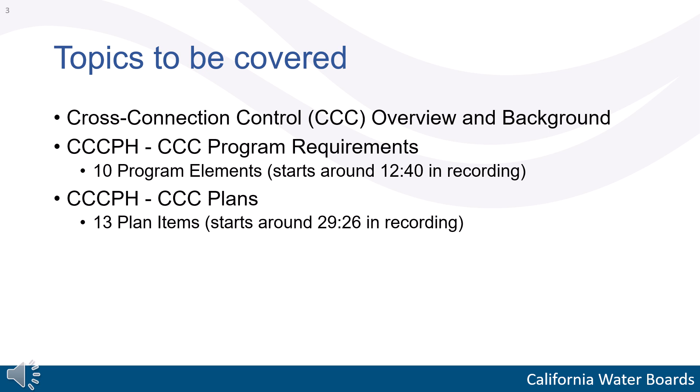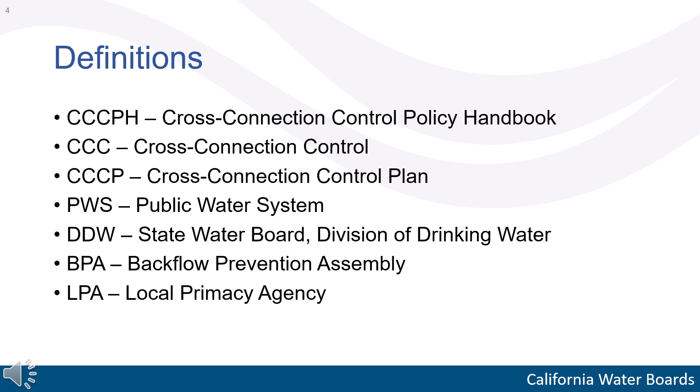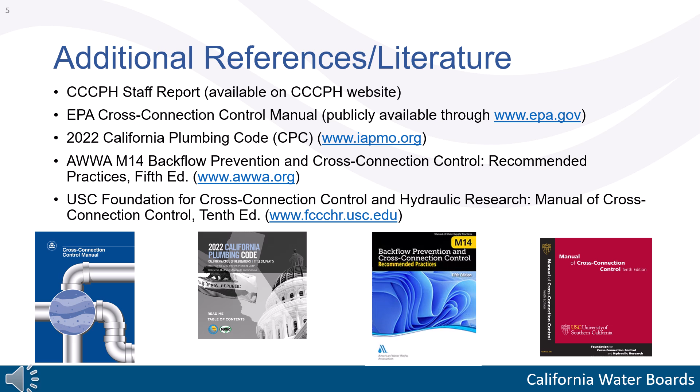This presentation primarily focuses on describing the requirements listed in the handbook. If you feel you need additional information on topics contained in this presentation, here is a list of other resources available. There is a staff report that accompanies the handbook and provides background into the requirements of the handbook. The staff report is available on the state's handbook website. Other sources listed here include the EPA Cross-Connection Control Manual, which is publicly available for free through the EPA's website. The California Plumbing Code contains plumbing requirements, some of which were carried over into the handbook, and is available through IAPMO. AWWA M14 and USC's 10th edition manual for cross-connection control have a lot of useful information on backflow prevention assemblies and developing a water system's cross-connection control program.

On our Cross-Connection Control Policy Handbook website, we will post any updates, latest copy of the handbook, any proposed changes for public review and comment, cross-connection control plan templates for small community water systems and non-community water systems, information for certifying bodies looking for state recognition, and the email backflow@waterboards.ca.gov to contact us with any general handbook questions. Any questions specific to your water system or review of your plan should be directed to your local DDW district or LPA office.

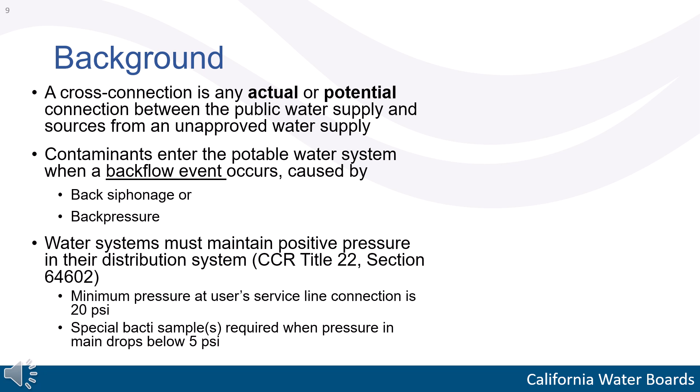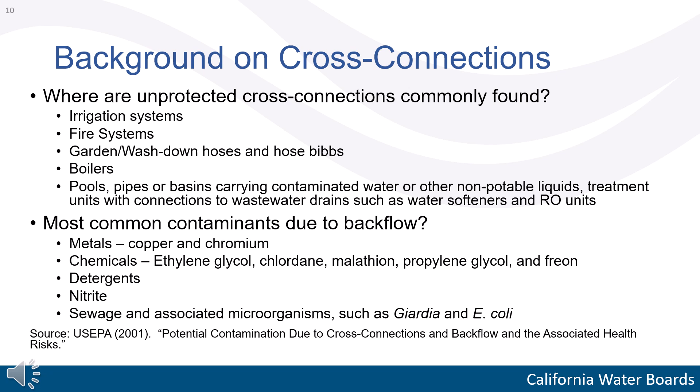When backflow does occur, the most common contaminants found include heavy metals such as copper and chromium, pesticides such as chlordane and malathion, chemicals such as ethylene glycol, propylene glycol, and freon, detergents, nitrite, and sewage microorganisms such as E. coli and Giardia. Some of these contaminants can cause acute illnesses. Many backflow incidents go unreported or undetected.

When a cross-connection exists, backflow protection is needed. This can be done in the form of an air gap, which are commonly built into household fixtures. Air gaps are also needed in industrial applications to provide a physical separation between the potable water supply and industrial processes or wastewater drains. Per the plumbing code, any wastewater or sewer drain must be separated from the potable water supply through an air gap. Air gaps must be inspected regularly as they can be easily bypassed or modified.

For when an air gap is not practical, there are several types of backflow prevention assemblies and devices. Assemblies that can provide backflow protection and are installed in the waterline are the Reduced Pressure Principle Assembly, or an RP, Double Check Valve Assembly, or a DC, Pressure Vacuum Breakers, or PVBs, Atmospheric Vacuum Breakers, or AVBs, and Single Check and Dual Check Valves. RPs, DCs, PVBs must be tested annually.

RPs can provide protection against health hazard contaminants, back pressure, and back siphonage. DCs can also protect against back pressure and back siphonage, but they can only be used in low hazard situations. PVBs and AVBs are found on irrigation systems and protect against only back siphonage, but not back pressure.

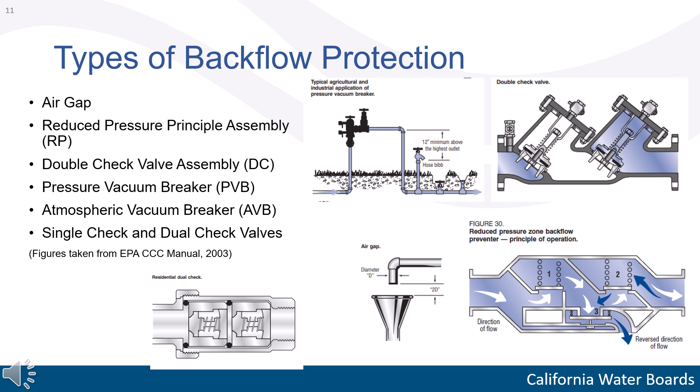What is the responsibility of public water systems? The previous regulations, Title 17, and now the Handbook, require water systems to protect the potable water supply through the implementation of a cross-connection control program. Title 17 had required 6 elements in a cross-connection control program, while the Handbook now has 10 required elements, which are presented on the next slide. A cross-connection control program is intended to reduce the risk of contamination of the potable water system by identifying, eliminating, and controlling cross-connections. Per the Handbook, the program must be described and documented in a cross-connection control plan.

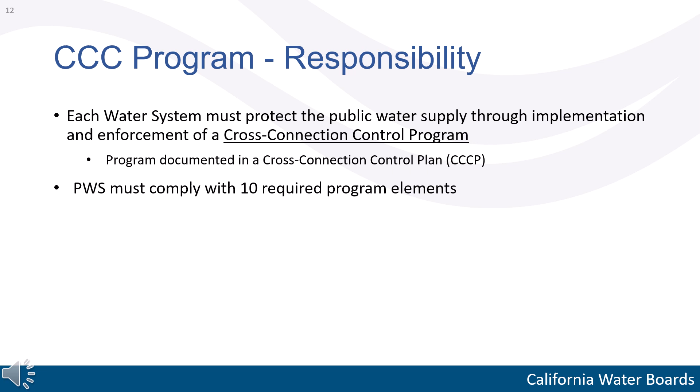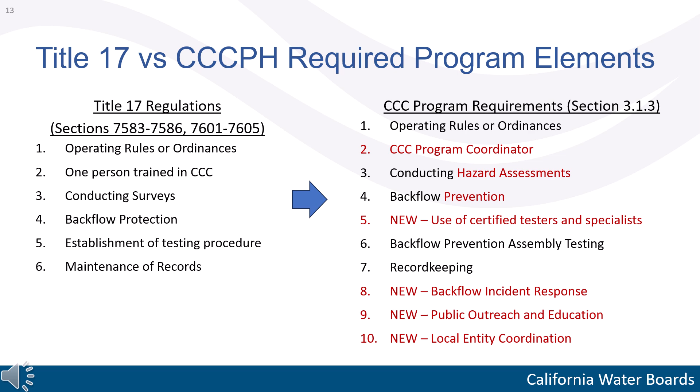It's also important to note that the Handbook focuses on protection of the water system at the service connections, also referred to as the premise containment protection or meter protection. This is a little bit different from protection requirements within customer premises, such as protection at the taps or point of use, and this is considered internal protection. The staff report and AWWA M14 manual also provide additional descriptions of each of the required elements.

Cross-Connection Control Program Element 1, Operating Rules or Ordinances, or also referred to as Legal Authority. The Handbook provides water systems the legal authority to administer its cross-connection control programs. In order to administer the program, water systems need to have a set of operating rules or ordinances to enforce requirements on its customers. This was also a requirement under Title 17.

Under the Handbook, water systems also need to include a corrective action to ensure compliance with the Handbook requirements, such as penalties for delinquent testing, installation, and repairs. These corrective actions could consist of discontinuing water service or fines, or the water system could opt to install, inspect, and maintain the backflow assemblies for the customers.

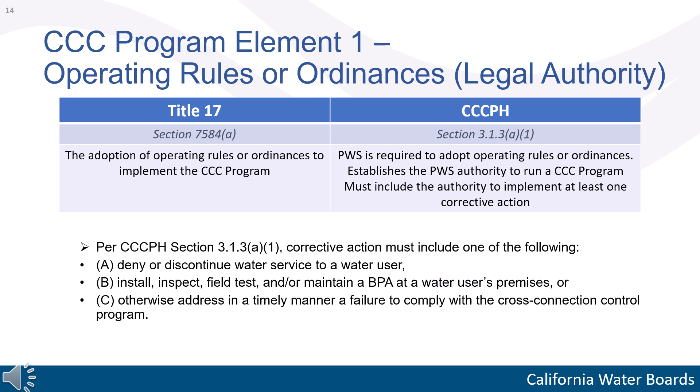Legal authority could come in the form of a municipal code, ordinance, resolution, bylaws, or written agreements between the water system and its customers. If a water system maintains ownership of all the water use facilities within its system, such as government-owned institutions, individual schools, or businesses that also manage its own water supply, then this should be noted on the plan in order to cover the legal authority requirement.

Cross-Connection Control Program Element 2, the Program Coordinator. The Handbook provides much more specificity on staffing requirements for administering a cross-connection control program. All water systems must designate a coordinator to ensure that the program is consistently maintained by a designated person.

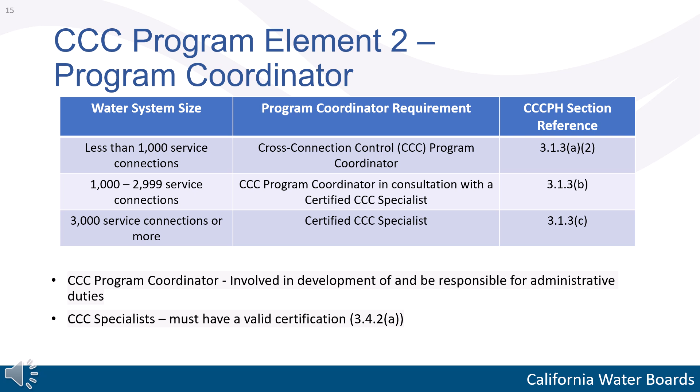For water systems with 3,000 service connections or more, the coordinator must also be a certified cross-connection control specialist. Water systems with 1,000 to 2,999 service connections need to consult with a specialist on developing the program, writing the plan, and reviewing hazard assessments.

Cross-Connection Control Program Element 3, Hazard Assessments. What is a hazard assessment? A hazard assessment is the evaluation of a water user's premises for the potential of backflow and the associated degree of hazard to the public health through the water supply if backflow were to occur. These evaluations were required under Title 17.

The intent of a hazard assessment is to identify potential hazards from a water user that could pollute or pose a health risk to the distribution system. Identified hazards need to have adequate backflow protection.

Internal protection, or backflow protection within the premises, can be used, but this is generally more difficult to track as a water system jurisdiction ends at the meter. For Handbook compliance, backflow protection corresponding to on-site hazards is required at the service connection unless internal protection is used. The hazard assessment requirement also includes residential connections, which were also included under Title 17.

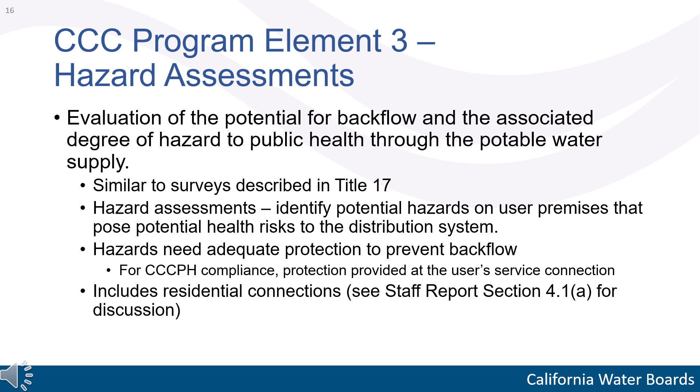The purpose of hazard assessments is to assess the degree of hazard posed by the on-site plumbing of a water user and determine what type or if backflow protection is needed. Training on cross-connection control is needed to identify these hazards.

The hazard assessment must consider the items listed in the table here, such as existing cross-connections, materials used on site, likelihood of backflow occurring during back siphonage and back pressure events, piping complexity and modifications, any pressurized systems on site, auxiliary water supply sources, previous cross-connections, or backflow incidents.

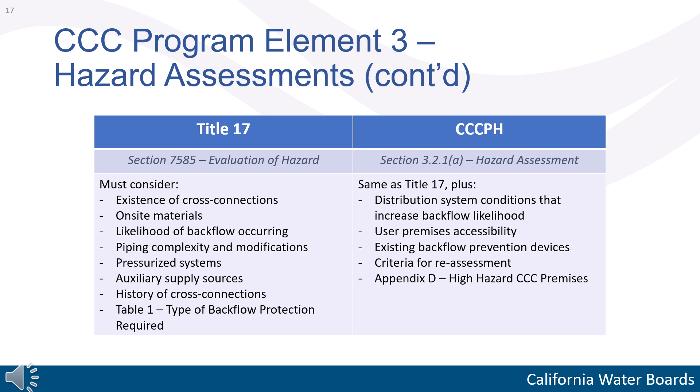The Handbook also includes inherent characteristics of the distribution system that increase the chances of backflow, accessibility of the user's premises, existing backflow prevention assemblies, and criteria for reassessment.

For hazard assessments, some premises have already been identified to be high hazard. Appendix D of the Handbook provides an example list of premises that require backflow protection in the form of an RP or air gap. Some of these examples were previously listed in Title 17, Table 1. To identify a premises as a high hazard premises on this list, the water system must have a current hazard assessment documenting the hazards for the user's premises.

Service protection is also required for high-rise buildings and any structures, including residential homes, that are situated at a higher elevation than the distribution system. Requirements for fire protection systems are noted separately in Section 3.2.2 of the Handbook and are required within 10 years of the Handbook effective date, which is July 1, 2024.

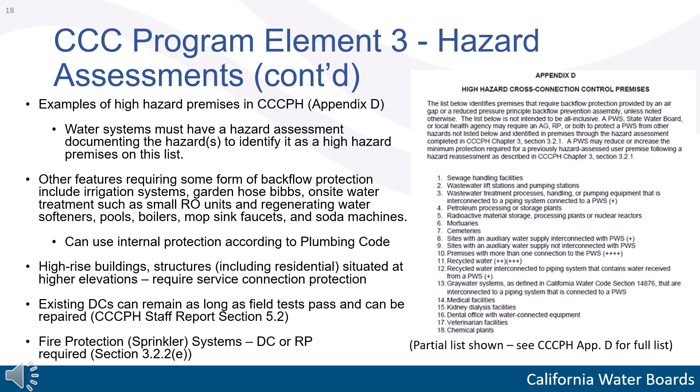How are hazard assessments to be conducted? Hazard assessments must be conducted by a certified cross-connection control specialist or by somebody with cross-connection control training and overseen by a certified specialist. A hazard assessment can be done through an on-site inspection. However, on-site accessibility may be problematic for some premises.

The handbook notes that the hazard assessment can be done off-site using administrative tools such as customer water use surveys, a review of building or permit records, review of water use activities, and GIS tools. Each method has its benefits and drawbacks. The method of hazard assessment depends on the specialist and water system preferences for its own water system. The chosen method needs to be described in the cross-connection control plan, which will be discussed later.

Any hazard assessments that have been conducted in the past can be used for the initial overall hazard assessment as long as the conditions of the water user have not changed. The handbook also requires reassessments to be performed when triggered by certain criteria listed under Section 3.2.1 of the handbook. This includes the changing of account holders, new or reconnecting service connections, changes in water use on the premises, backflow incidents occurring, or if the water system concludes the existing hazard assessment is no longer current. Reassessment is also needed on a periodic basis or upon request by the State Water Board.

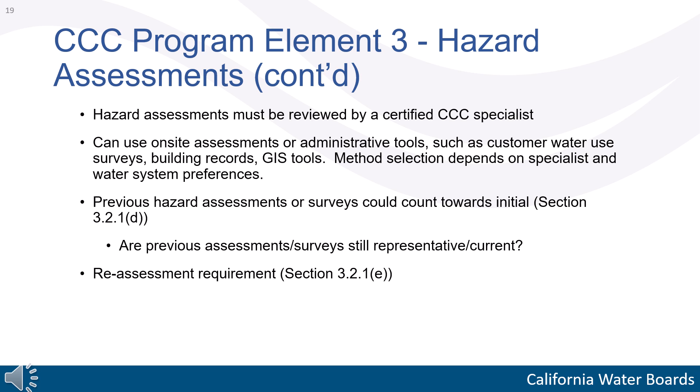Cross-Connection Control Program Element 4, Backflow Prevention. Required Program Element 4 covers backflow prevention, which is ensuring that cross-connections are eliminated when possible or controlled by the installation of an approved backflow prevention assembly. This type of backflow protection should correspond with the highest identified degree of hazard at a water user's premises.

This table shows the Title 17 requirements compared to the handbook. Title 17 required assemblies pass laboratory and field testing by a recognized testing organization, while the handbook further defines those standards, which includes standards from USC and ASSE. The handbook also stipulates that assemblies cannot be modified after approval. The handbook also provides more specific installation and design requirements, including those for air gaps. Diagrams for backflow prevention assemblies are provided in Appendix C of the handbook.

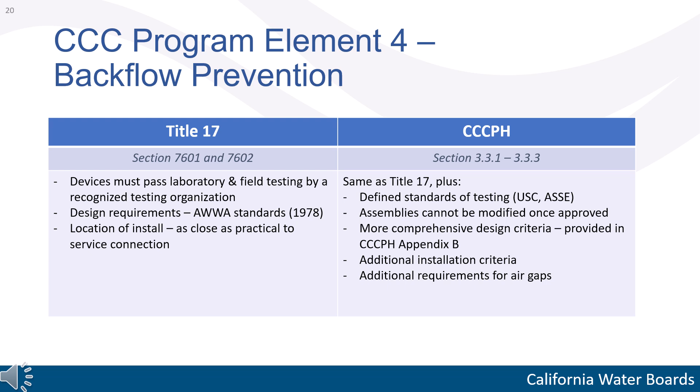More on backflow prevention. Per the handbook, cross-connections should be eliminated or protected with a backflow prevention assembly. Water systems will need to implement corrective actions on its water users when an unprotected cross-connection has been found, the installed backflow prevention assembly does not correspond to the hazard identified, or the assembly requires maintenance or replacement. Testers do need to notify water systems in a timely manner of assemblies that have failed testing, been modified, removed, or pose a cross-connection risk. The handbook also includes criteria pertaining to swivel-ells in Section 3.2.2d and Appendix C.

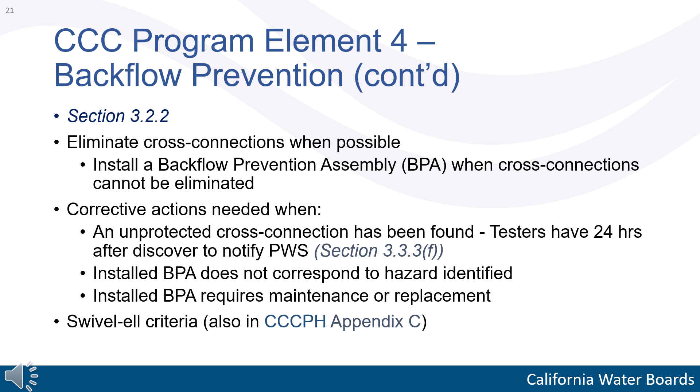Backflow prevention with respect to fire sprinkler systems. The handbook specifies requirements for fire sprinkler systems. Water systems are required to ensure its distribution system is protected from fire systems with at least a double check within 10 years of the handbook's effective date, which is July 1, 2034. Fire systems that are considered high hazard, such as those that allow chemical addition, require protection with at least an RP. This requirement also applies to existing fire systems and fire department connections, or FDCs.

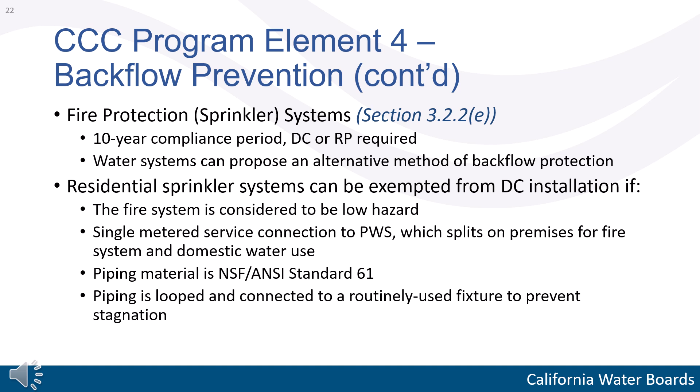When a double check or an RP cannot be installed on a fire protection system within 10 years, water systems may propose an alternative date or alternative method of backflow protection. These alternatives must provide the same level of protection. Low-hazard residential fire systems may be exempted from DC installation if the system is considered a flow-through system, where the residence is served by a single service connection for both domestic and fire use, piping material is NSF/ANSI 61, and the piping is connected to a fixture to prevent water stagnation. This exemption does not apply to fire systems requiring protection with an RP.

Cross-Connection Control Program Element 5, Tester and Specialist Certifications. Tester and Specialist Certifications was added to the handbook as a new requirement. Previously, Title 17 had noted testers and specialists only needed to demonstrate competency, which was generally done through training and/or certification from various organizations with no regulatory oversight.

The handbook specifies certain requirements specifically for certifying organizations, which include obtaining State Water Board recognition through an application and review process, obtaining ANSI accreditation by July 1, 2027, and training, course, exam, and recertification requirements for both tester and specialist certifications. The state website has a list of certifying organizations posted. Some organizations are working on obtaining State Water Board recognition.

Cross-Connection Control Program Element 6, Backflow Prevention Assembly Testing. Assembly testing requirements in Title 17 have been mostly carried over to the Handbook, with a couple of additional requirements. The type of backflow protection must correspond with the degree of hazard identified through the hazard assessment, and this needs to be verified through field inspections.

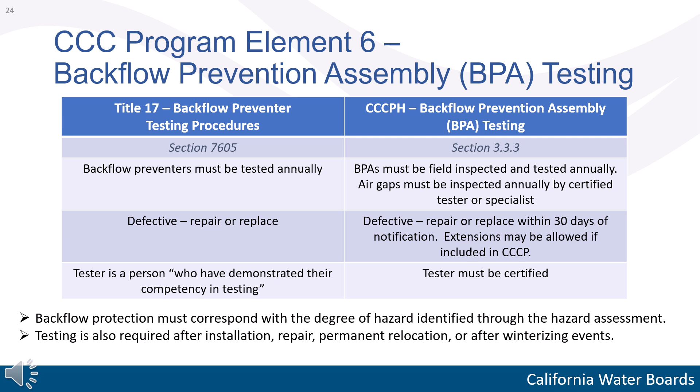Cross-Connection Control Program Element 7, Record Keeping. The Handbook expanded on the record-keeping requirements from Title 17. Each backflow prevention assembly, air gap, and swivel-ell used for Handbook compliance must be recorded along with its assembly type, model, location, recent tests, install date, and any repairs conducted. Records must be kept on file for at least 3 years.

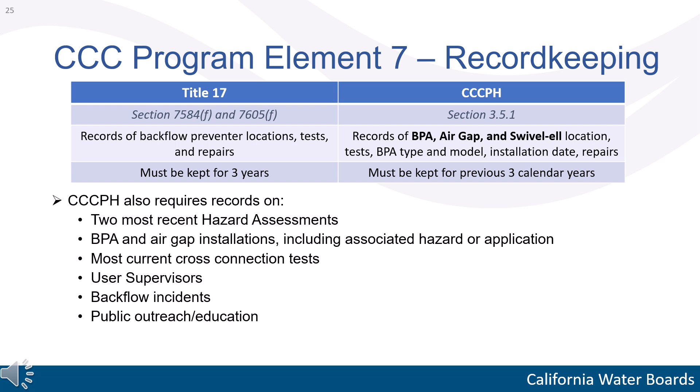The Handbook also requires water systems to maintain records on hazard assessments, associated hazard for each backflow prevention assembly and air gap installation, any recent cross-connection tests, a list of user supervisors, records on backflow incidents, and any materials used for public outreach and education. Water systems can store these records on paper or electronically using a database.

Cross-Connection Control Program Element 8, Backflow Incident Response Reporting and Notification. Backflow Incident Response is a new program element that was added to the Handbook. This element requires water systems to investigate, respond, and provide notification to the state when a suspected backflow incident has occurred. Many suspected backflow incident investigations are triggered by customer complaints about their water quality or by an outbreak of illnesses or disease.

Water systems must document its response to the investigation, such as recording any samples, water pressure changes, or corrective actions or follow-up activities performed. Water systems are required to notify their DDW or LPA office of any known or suspected backflow incidents within 24 hours of determination. The water system may be requested to provide a backflow incident report. Notification to the state is also needed for coordination efforts between local agencies, public notification, and assistance with any follow-up activities.

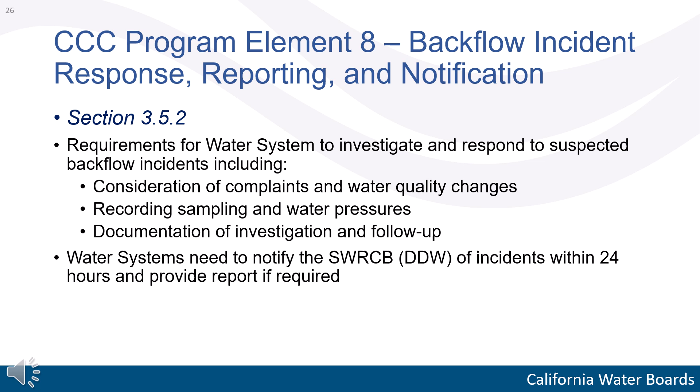Cross-Connection Control Program Element 9, Public Education and Outreach. Another new element added to the Handbook is a requirement for public education and outreach. This is intended to educate and inform water staff and customers, as many are unaware of the health risks and impacts from cross-connections and backflow. With more knowledge, the hope is that customers will be more aware and knowledgeable of their plumbing fixtures and water use, reducing the number of cross-connections and thereby reducing the likelihood of backflow incidents.

Water systems can conduct public education and outreach through a couple different ways, such as using bill inserts, language in the consumer confidence reports, websites, outreach events, etc.

Cross-Connection Control Program Element 10, Local Entity Coordination. Local entity coordination is a necessary component of an effective cross-connection control program. Installation and/or modification of backflow prevention assemblies, such as those in new construction or redevelopment projects, often involve plumbing code officials such as building and safety or permitting departments. Oftentimes, these officials or departments are informed first about the new water users and plans that are assessed for hazards and backflow protection.

Backflow protection assemblies found on fire protection systems often require coordination with the local fire department or fire marshal. Internal backflow protection, such as those found in restaurants, hospitals, and other commercial establishments, may be under the purview of local county health departments. Coordination between local entities and water systems is also necessary when a backflow incident occurs.

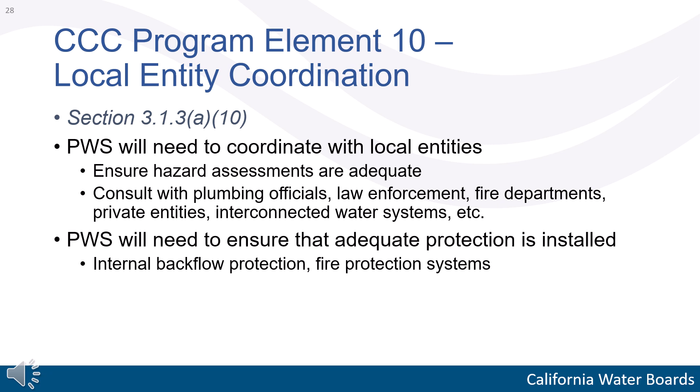Cross-connection control plans. A new requirement with the Cross-Connection Control Policy Handbook is the development of a cross-connection control plan. The plan is due 1 year after the Handbook's effective date, which is July 1, 2025. Water systems can request an extension if more time is needed to develop the plan. Public water systems are required to implement a cross-connection control program in accordance with the requirements in the Handbook.

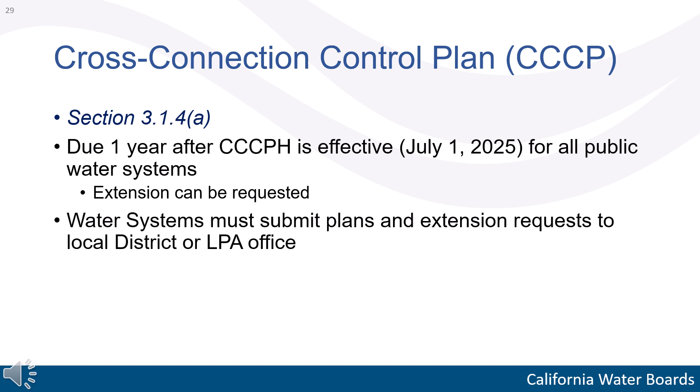The cross-connection control plan is one of those requirements and serves as a document description of a water system's cross-connection control program. A water system can implement its plan before receiving plan approval from the state. If a water system needs a special or expedited review of its plan, they should coordinate this with their district or LPA office. In general, each water system is different, and the plan should be written to reflect these differences within each water system.

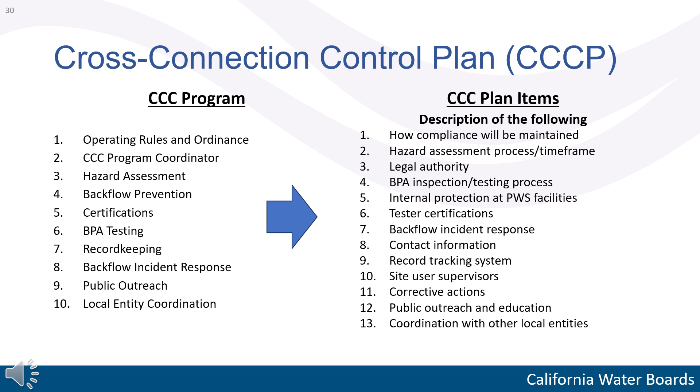Cross-connection control plan item 1, the compliance statement. The compliance statement is a description of how the water system will achieve and maintain compliance with requirements in Chapter 3 of the Handbook. This can be a basic statement such as, the water system will protect its potable water supply through the implementation of its cross-connection control program described in this plan, or something similar.

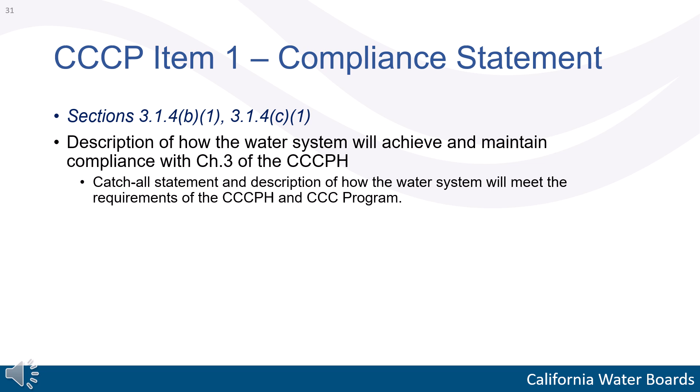Cross-connection control plan item 2, hazard assessments. The water system must describe its process used for conducting hazard assessments. A hazard assessment can be done through an on-site inspection or using administrative tools such as customer water use surveys, review of permit records, review of water use activities, and GIS tools. Each method has its benefits and drawbacks.

The method of hazard assessment depends on the type of premise being assessed, specialist, and water system preferences. The water system also needs to note who will be conducting the hazard assessments. Options include the water system's certified specialist, or trained staff being overseen by the certified specialist, or an outside contractor with a specialist certification.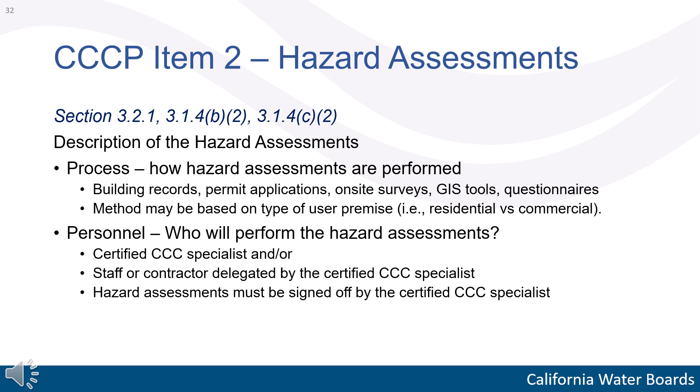For community water system hazard assessments, the timeframe for completing the initial hazard assessment needs to be included in the plan. Water systems must propose this timeframe and should include how many assessments are expected to be completed each year to explain the timeframe. For larger water systems, the timeframe can be broken into separate categories based on its service area or potential hazards, such as a timeframe for industrial users, commercial users, and/or residential users.

It is recommended that the water systems prioritize higher risk water users. Water systems should also note when periodic hazard assessments are to be conducted and specify the conditions or triggers for reassessing a premises.

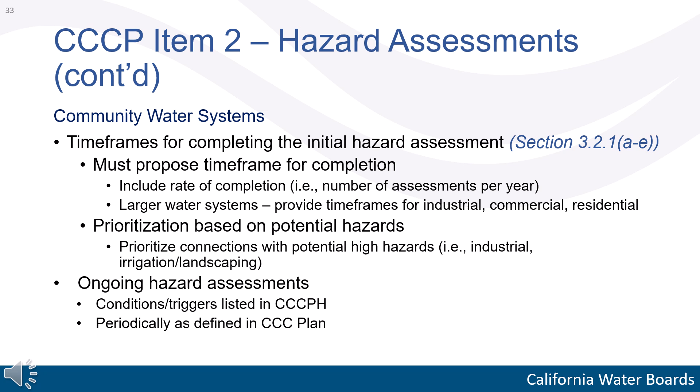Cross-connection control plan item 3, legal authority. Legal authority was described in our handbook presentation covering the background and program elements. For the cross-connection control plan, water systems are required to provide a copy of its legal authority needed to administer its cross-connection control program. The legal authority could come in the form of a municipal code, ordinance, resolution, operating rules, contractual agreement for water service, etc. The legal authority should have an adoption or effective date.

If it has not yet been adopted by the water system's governing board, a timeframe for anticipated adoption needs to be included in the plan. If legal authority is not needed because the water system already has or has taken on the responsibility of implementing its own backflow protection measures, then this should be noted in the plan. For example, this can occur in commercial or institutional facilities that maintain its own water system.

Cross-connection control plan item 4, backflow prevention assembly inspection and testing. For this plan item, describe the process and timeframes for ensuring each backflow prevention assembly is inspected and field tested, and each air gap used for the handbook compliance is inspected annually. Water systems are also required to ensure that backflow prevention assemblies are installed when required, installed correctly, not modified, damaged, vandalized, or removed, etc.

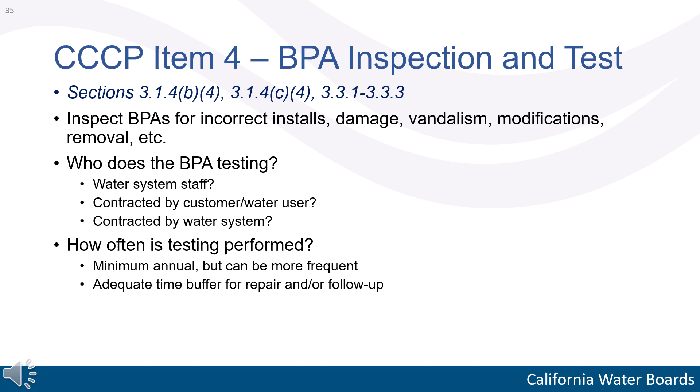Cross-connection control plan item 5, non-testable devices. This plan item refers to internal backflow protection at a water system's own facilities, such as treatment plants, booster pump stations, well sites, tanks and reservoirs, etc. Water systems are required to describe the process and timeframe for inspecting and maintaining backflow protection devices found within its facilities. This includes any vacuum breakers, check valves, air gaps, hose bibs, etc.

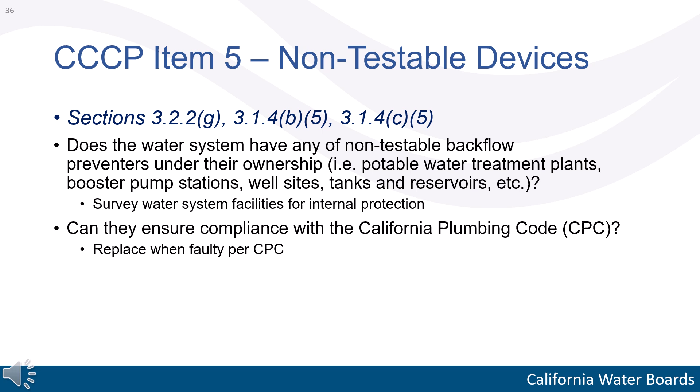Cross-connection control plan item 6, tester qualifications. Water systems are required to confirm testers used are certified, using field test equipment that has been verified for accuracy, and submitting completed test reports. In the plan, water systems must describe the process used to verify its testers. For larger water systems, one example is the use of an approved tester list, in which testers are required to apply annually for a pre-approved tester list and submit field test equipment verification paperwork. This list could be maintained by an outside entity or by the water system itself.

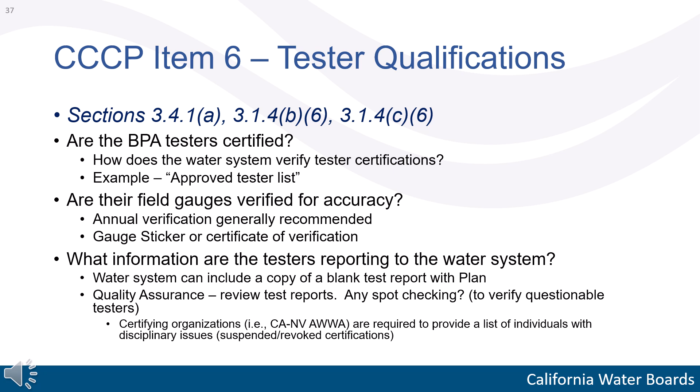Another example is that water systems could verify testers as test reports are being submitted. Water systems also need to note what information is being reported to the water system. This can be achieved by including a copy of the test report in the plan. Water systems should also include a quality assurance protocol to verify testers are completing test forms correctly. Water systems can have a spot check program in place to identify any problematic or questionable testers. Examples of problematic testing would be falsified testing records or drive-by testing. Any testers found to be negligent should be reported to the certifying organization for investigation and corrective actions.

Cross-connection control plan item 7, backflow incidents. Water systems are required to develop and implement procedures for investigating and responding to suspected or actual backflow incidents. For the plan, the water system must include a description of how it will respond to backflow incidents.

Backflow incident response must include DDW or LPA notification, impacted customer notification, identification of the backflow substance, operational response to the incident, such as isolation of the area within the distribution system and subsequent corrective actions, customer complaint documentation, and any other related actions and follow-up activities.

Backflow incident response should be coordinated with a certified cross-connection control specialist and the local DDW LPA office. If directed by the State Water Board, the water system may be required to issue a Tier 1 public notification. The Handbook contains an example backflow incident report form in Appendix F, which may be used in reporting the incident to the State Water Board.

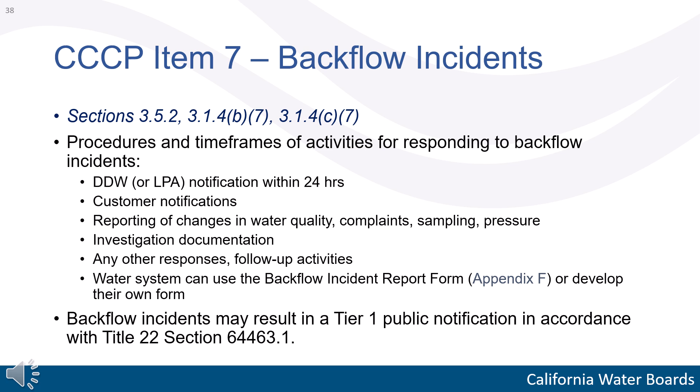Cross-Connection Control Plan Item 8, Contact Information. This plan item is pretty straightforward. The plan must include contact information for the Cross-Connection Control Coordinator and/or specialist and any other persons involved with the Cross-Connection Control Program.

Cross-Connection Control Plan Item 9, Tracking System and Record Keeping. For this item, water systems are required to describe its system used to track hazard assessments, backflow prevention assemblies, and air gaps used for handbook compliance, the location, type, and testing of these assemblies, and fire system backflow protection. Water systems can use any system it finds suitable for its service area. This information should be readily available upon request by the State Water Board or for public or customer inquiries.

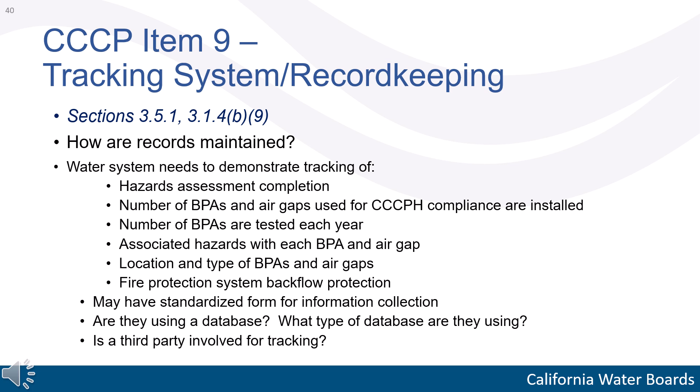For non-community water systems, the tracking and record-keeping requirement is similar to community systems. In addition to any service connection backflow protection, non-community systems must also track backflow prevention assemblies and other devices used for internal protection, as well as the associated hazard for each device. This includes an inventory of any air gaps, single checks, dual checks, atmospheric vacuum breakers, hose bib vacuum breakers, anti-siphon devices, etc. The template provided on the state website includes an attachment page for inventorying these items.

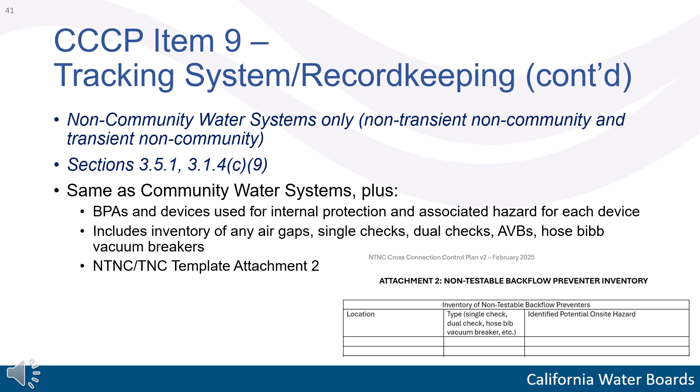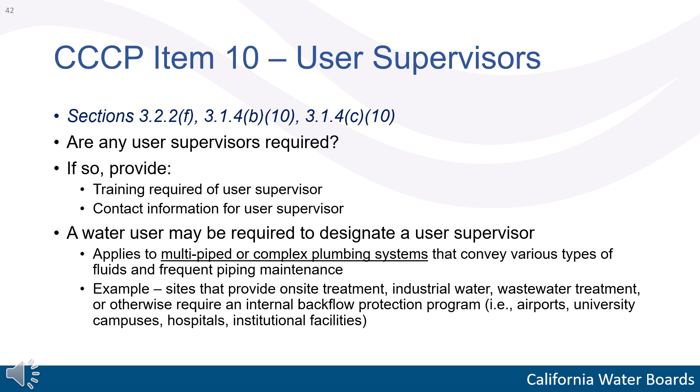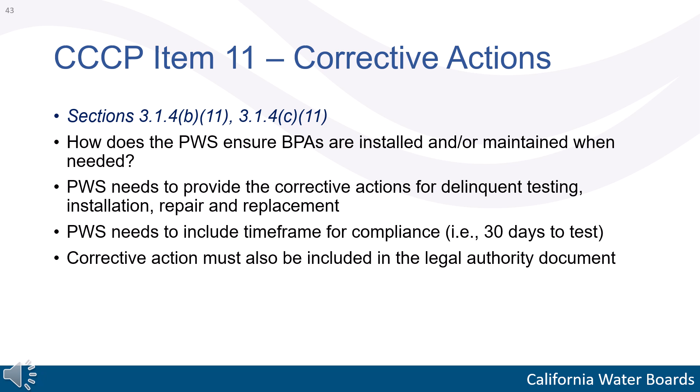Cross-Connection Control Plan Item 11, Corrective Actions. The water systems must describe the process on how it will enforce compliance with handbook requirements, such as testing, inspections, repairs, replacement, or installation of a backflow prevention assembly or air gap. This should be included in the water system's legal authority document. The water system needs to describe how it will implement the corrective action. This may include the use of warning letters, fines, or service disconnection. A timeframe for corrective actions, for example 30 days, also needs to be noted.

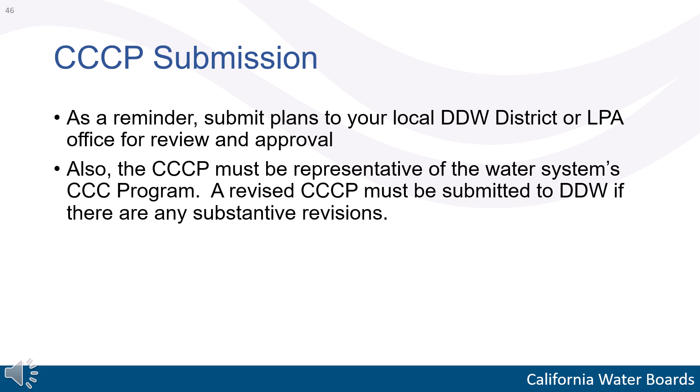This concludes the overview for developing a cross-connection control plan. To comply with the plan requirement of the handbook, plans need to be submitted to the local district or LPA office by the deadline. Also, the plan must be current and representative of the water system's cross-connection control program. If there are any substantive changes to the program, the water system is required to submit a revised plan.